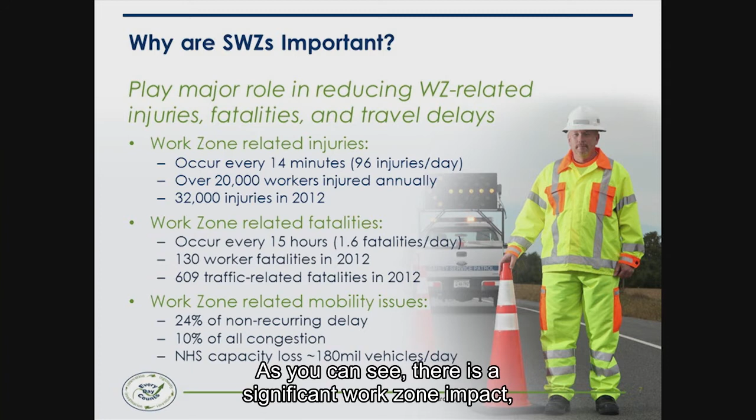In order to understand the need for smarter work zones, it is important to understand the scope of the work zone mobility and safety problem. Here are some statistics: in regards to safety, during 2012 we had 32,000 injuries and 609 traffic-related fatalities. In the case of mobility, work zones result in approximately 24% of non-recurring delay and 10% of all congestion. This results in a National Highway System capacity loss of approximately 180 million vehicles per day and an annual fuel loss of over $700 million. As you can see, there are significant work zone impacts, and therefore the need for smarter work zones becomes very important.

So we have identified two initiatives: the project coordination and the technology application. We will discuss this in more detail after the introduction segment.

We're currently working on an implementation plan, and right now we are asking you to provide feedback. We have been doing seven summits, and this will be our sixth summit. We have one more summit, and we need your help to understand what your needs are and what tools we can develop to help you implement the Smarter Work Zone initiatives in your state.

Our plan will establish goals for specified numbers of state DOTs to adopt activities under the identified initiatives that I mentioned earlier. The plan, again, is to have an implementation plan by January 2015.

Federal Highway staff from Headquarters Office, Resource Centers, and division staff will be providing technical assistance to the state DOTs to overcome barriers and any obstacles during the implementation of these initiatives. The support may include pamphlets, workshops, webinars, and peer-to-peer exchanges.

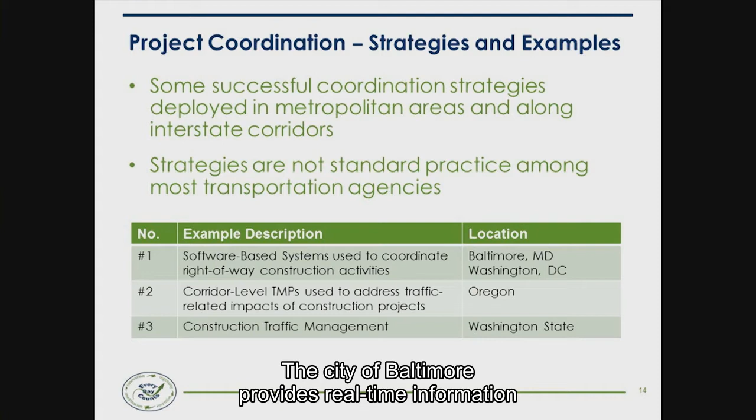The City of Baltimore provides real-time information on infrastructure projects across the city via a web-based system accessible to all stakeholder groups, and each project is mapped via GIS data points.

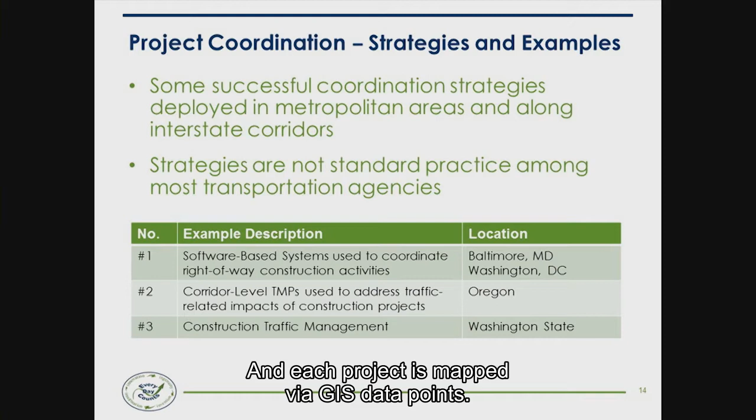Before this project, they had a meeting with all the city staff, gas companies and water companies, and found out that 90% of the roadway cuts were being conducted due to requests from the local gas and water companies. Since then, they have tried to coordinate these events, and during the first year of implementation, they reported cost savings of between $350,000 to $500,000. So you can see coordination not only can save you money, but also retain the quality of your pavement.

In Washington, D.C., DDOT has a project management system that tracks and analyzes the cumulative impacts of all work zone projects by the DOT, the developer, and utilities for a moving 5-year period. The system allows for early identification of project conflicts and impacts, and gives greater ability to reduce and manage traffic disruptions for road work.

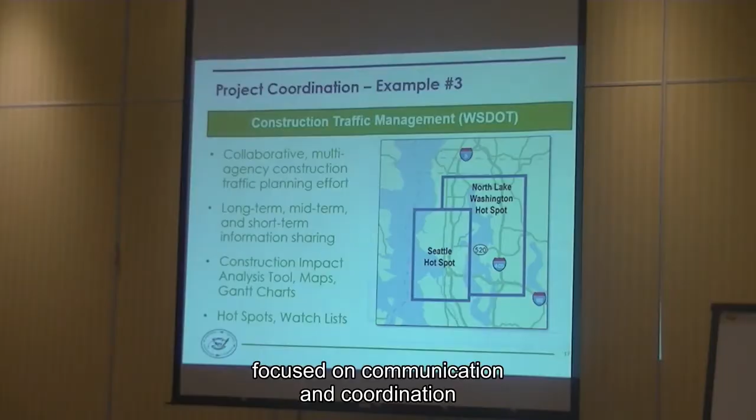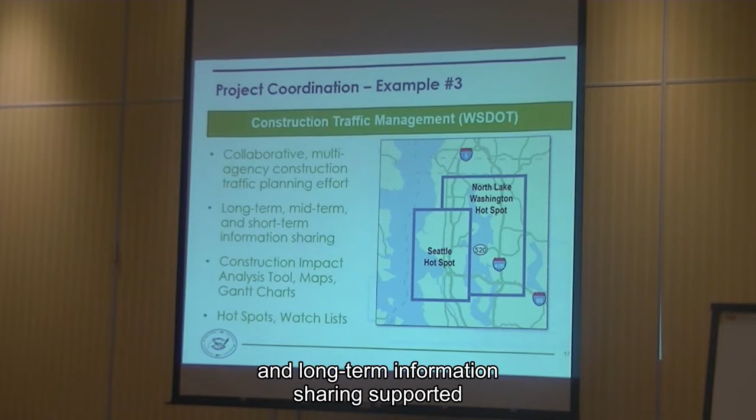Washington State has a collaborative multi-agency construction traffic planning effort focused on communication and coordination amongst projects and agencies in the state. These coordination efforts include short-term, mid-term, and long-term information sharing supported by tools developed by the Washington DOT.

There is a project coordination tool available called the Work Zone Implementation Strategies Estimator, also known as the WISE tool. It's a product of the SHRP2 R11 project, and it proactively reduces work zone impacts.

It includes two modules: the planning module with optimized sequencing of renewal projects that feeds into the operations module, using DYNASMART-P as a platform to evaluate impacts for individual strategies at the project level. The target audience is planners and program managers in moderate and large MPOs with an active renewal program.

This tool helps bridge the gap between planning, the MPO, and the design and construction offices. It has the ability to analyze demand and duration-based strategies. Information about that tool is now available in documentation and a user guide at TRB.

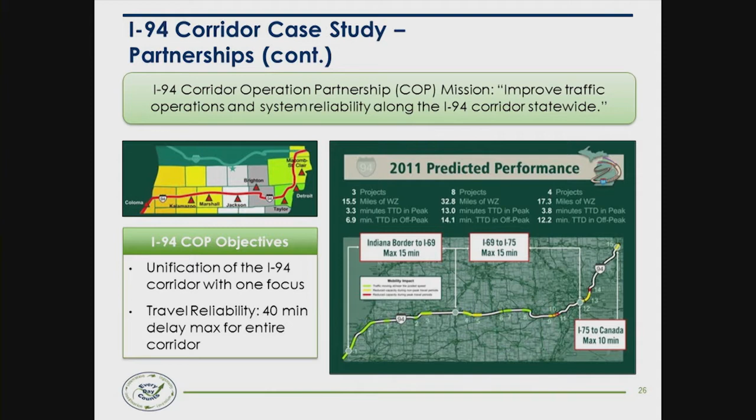Once they started looking at the travel delays, then they wanted to say, all right, how do we bring this down to user delay costs? And to start that, they wanted to look at recurring and non-recurring congestion. Obviously, recurring congestion is your normal commute periods when you have your traffic level out there. And then when they started to look at it, incidents were something that no matter what they did, whether it was a weather-related event, a work zone, incidents on the roadway were common across all barriers.

So they decided to segregate out those 3 categories: normal recurring congestion, work zone congestion, and winter-related. Being in Michigan, they have their fair share of snow. And what they found was more than half of the delays that they saw in that corridor were because of winter or work zones. Obviously, they knew that they had to make a change.

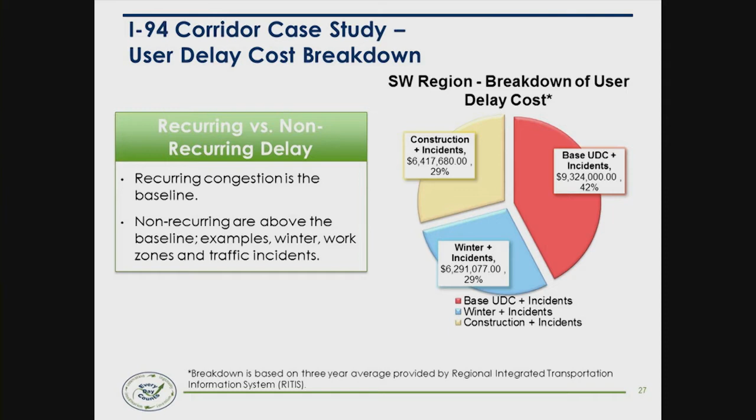Knowing now that they have the issue with delays and they were starting to predict what their delays are in work zones, they started to actually measure user cost performances. So they set a goal in 2013 of a maximum user delay of $108 million across the board for all the different projects they would have going on.

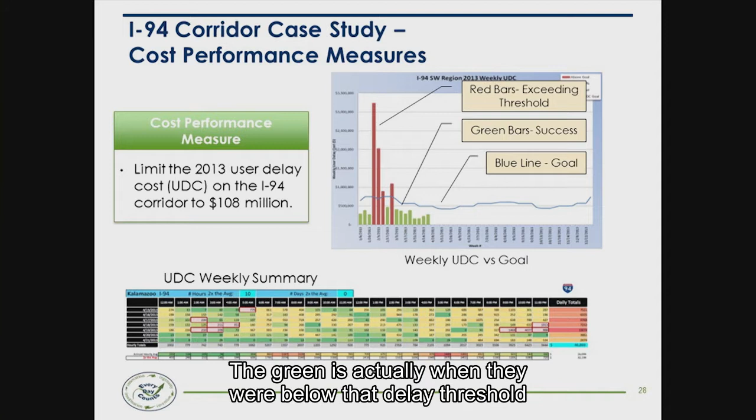Collecting that data for the 275-mile corridor, they developed scorecards. This is a year-to-date scorecard, and this is their goal threshold line. The green is when they were below that delay threshold as they're tracking across the year, and the red is when they've exceeded it.

Then when they start looking on a weekly basis at the different projects they had going on, this scorecard was on their website, so the public could actually see what was going on. That forced a change in focus on the operations and construction side, that they didn't want to be held responsible for not delivering that goal.

This graphic is actually very complicated, but that scorecard was also on there. It was a daily and weekly summary of all the different projects they had going on. It's hard to read, but it was very transparent, and it actually caused them to change the way they were doing things.

Again, that's just summarizing the three colors. This goes back to 2011 data when they were using their predictive models, and this is what they charted out - basically the minutes of delay for each of the different projects within the three regions.

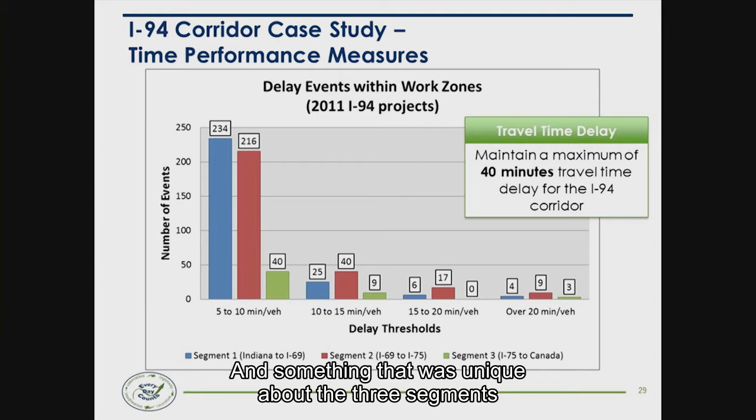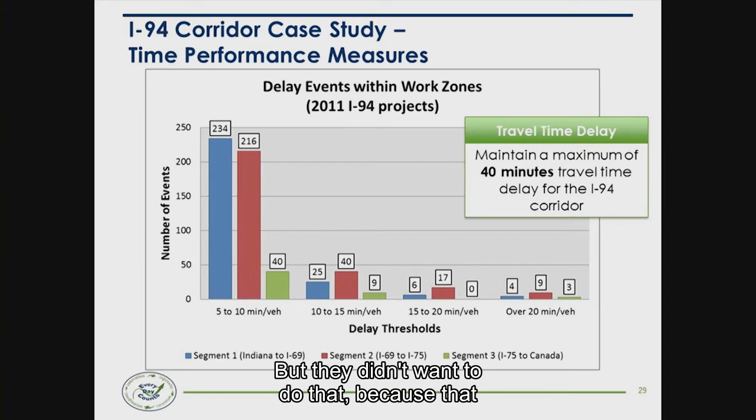Something unique about the three segments they created along this 275-mile corridor: the logical choice would be to make breaks at the regional boundaries, but they didn't want to do that because it didn't work with collaboration. They actually decided at key junction points along the corridor is where they would set the boundaries for measurement. That forced Region 1 to work with Region 2, and 2 to work with 3, as well as the different counties that made up those areas, so they were cumulatively working together to address those delays.

It sounds all well and good to start looking at this information, but they needed data, and they needed to start looking at the tools and technology they had out on the roadway. So starting in 2011, they started to implement a sizable amount of ITS equipment along the corridor so they could capture data on a real-time basis. Instead of just using predictive models, they were bringing in vehicle probe data and sensor data so they knew real-time what was going on, and then they started using that tool to backfeed some of their scorecard charts.

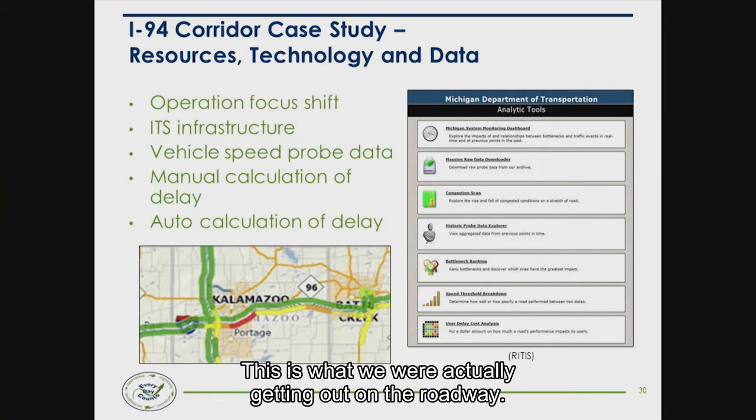So they said, we predicted a delay of X number of minutes - this is what we were actually getting out on the roadway. And they're continually reviewing that information and trying to improve their performance.

One of the other unique things they did was the communication. We all know that if you're going to collaborate, that communication process has to be part of the mix. So they set up maintenance of traffic huddles, weekly meetings where they brought in maintenance, operation, construction, and the permit section who was giving out private development or utility company permits. They all got together and discussed what projects are coming forward, how can we work together to minimize those delays across the region.

It actually forced a change in behavior where they would share time. If they had a project where they knew they were going to put in beams and have to do a rolling roadblock, or do a bridge demo that was going to cause more delay, they would actually borrow time from another project. So it really changed the focus of how they did things, and again, it was all driven by the decision from upper management, from the director who said you need to change.

Continuing with the communication, like I said, it came from the top. It gave them that support to make that time commitment. Obviously to meet and have those weekly meetings takes time out of normal activities. So that was one of the key components that forged this change.

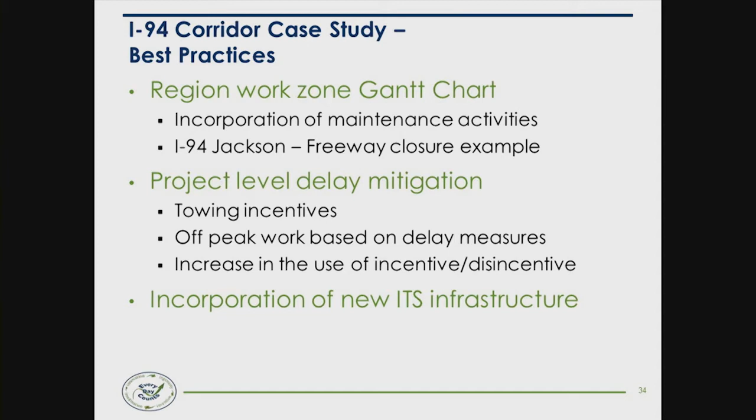So that was the case study from Michigan DOT. Chris Brooks from Michigan DOT provided this information. If there's any questions specifically to that—I know quite a bit about this from presenting it a few times now—but if there's more questions, you can ask Chris.

So what are the overall benefits of project coordination? We heard some examples from the municipalities—Baltimore, Washington D.C., Washington State, Oregon—and then we just saw the case study from Michigan. I think at the end it's that greater ability to reduce work zone impacts and disruptions onto the public. By early identification during the project development, if you can schedule and plan things out so you have this coordination, overall it's cost savings, fewer impacts to the public, and you can dynamically adjust that schedule based on knowing what's happening real time on the roadway.

Again, the improved communications among the transportation agencies—I can't understate how important that is, because everyone has their own mission, as I mentioned in the beginning. They all want to get their job done because they have a bottom line. They don't want to add cost to the project. But sometimes that coordination between the groups, you actually can show a cost savings, like in the case of Baltimore, where they were saving money after the first year. The public sees it as less disruption on them, less street cuts, better pavement quality, and I think it goes a long way to keeping satisfaction with the public.

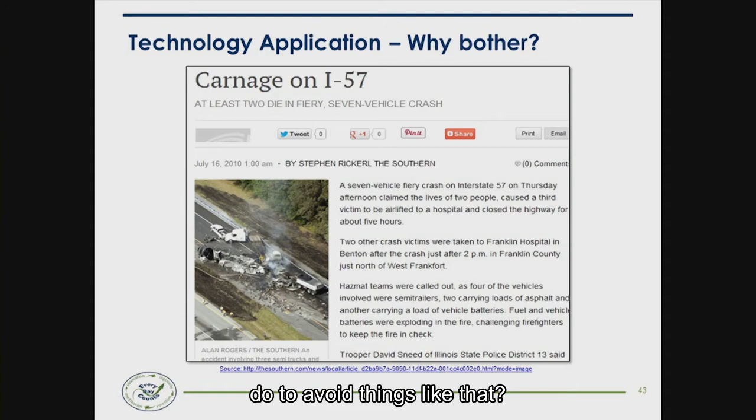I'm sure all of us have seen articles similar to this. And then you say, well, our work zone meets all our standard regulations, our standard drawings. The truck driver was hopefully not speeding. What else can we do to avoid things like that? Well, technology application may be the answer you're looking for.

When we're looking for technology applications, we want to make sure they are traffic responsive. They incorporate real-time data that provides enhanced information delivery to drivers, increasing awareness of changes to traffic conditions such as weather and congestion ahead, and enhancing compliance with static traffic controls. You don't want a portable message sign to replace or basically repeat the same message as a static sign. You want enough information where the driver can react, whether it's reduce speed ahead or be prepared to stop in advance of the work zone.

We want the functions to be automated and dynamic. We want the information delivery to not require special action on the part of the drivers. You don't want them calling 511 or looking at an app—it's looking at that PCMS and warning them in advance that there may be congestion ahead.

Other considerations: we want to make sure it's locally focused, targeting information to drivers approaching work zones. The technology application should provide a complete solution, not just sensors or cameras. We want them to all coordinate that information together, so when the sensor perceives congestion ahead or the cameras have seen it, it can go back to a traffic control device such as PCMS or dynamic board and show and warn drivers in advance that they may have a reduction in speed or may have to stop because of the condition ahead.

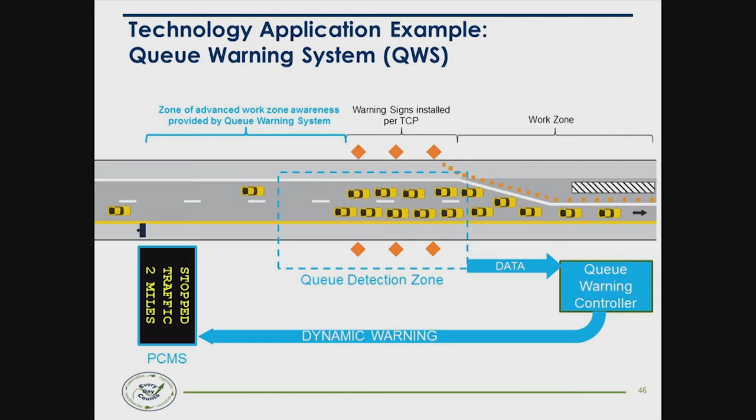Now, we understand that not all states have a law in place to implement this. But during this initiative, if your state wants to find out what other states are doing, and perhaps we were in the same situation a year or two ago, we can help you find that state and share their knowledge.

Now, if you do have a state law that allows you to have VSL signs, make sure that in order for them to be enforceable, they have to be black and white, because black and white means regulatory. If you have a sign with an orange background or a yellow background, that means warning.

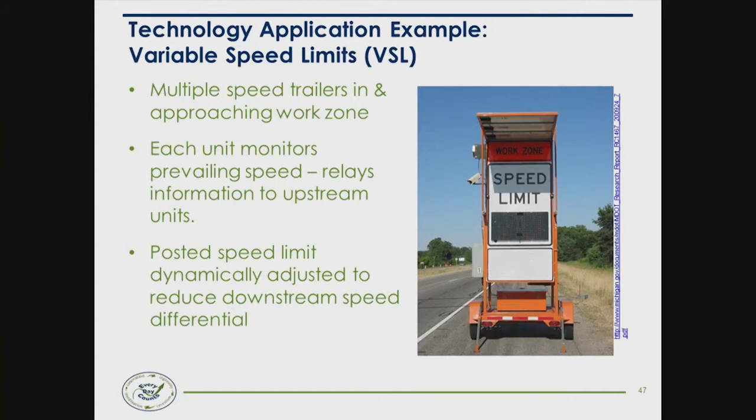Another example is the dynamic lane merge. In low volume traffic, the greatest safety concern is high-speed aggressive merging occurring at the merge point; in this case, the system instructs drivers to merge early to avoid unsafe last-minute maneuvers. In higher volume traffic, we want to maximize lane utilization and minimize queues, in which case the system instructs drivers to use both lanes up to the merge point and do an alternating zipper merge. In both cases, the direction to drivers is clear and there is no ambiguity over expected behavior.

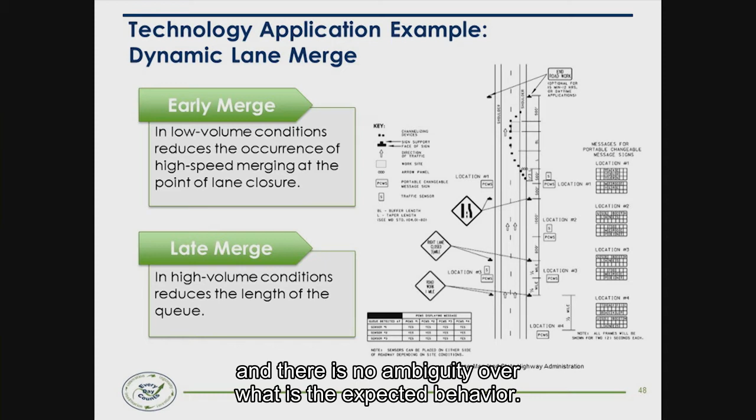So what are the system components? We need infrastructure: sensors, traffic control devices capable of receiving commands and changing their displays automatically, and communication infrastructure for making everything talk to each other.

But not only that, we need a business process. It's like we mentioned earlier with project coordination. You do have to have some standard drawings, specifications, and procurement elements that can help you move into the next project. We know all projects react differently, but you have to start thinking about how to implement these ITS applications, working them into your contracts, and having a specification that can help you during the project.

What we have found is that a few states have implemented different technology applications, but we're not standardized at a national level. Everybody's doing their own thing. We want, with this initiative, to promote smart work zone technology applications nationwide and create standardization.

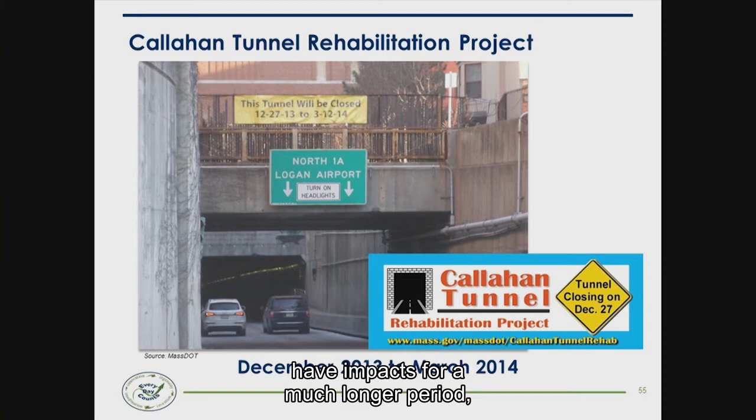This was a perfect example where we used project coordination and technology application to mitigate the impacts from this project. The Callahan Tunnel carries 30,000 vehicles a day departing downtown Boston, and we decided to shut that tunnel down completely to get in and get out in a 72-day period, rather than doing stage construction, which would have caused impacts for a much longer period and probably still the same level of congestion.

This tunnel is a 2-lane facility, and while it only carries 1,200 vehicles in the morning peak, it was that afternoon condition with 2,300 vehicles an hour in those 2 lanes that we had to disperse among other routes already over-congested in that PM peak period.

So why are we considering a smart work zone? In Massachusetts, we use them as a tool in our toolbox to mitigate impacts. The Work Zone Safety and Mobility Rule asks states to start looking at data and operations in that work zone. Now we're using the smart work zone for mobility applications - we want to use real-time information to deliver back to the public, to help them make route decisions and try to prevent congestion in areas where we don't want it.

Safety, as mentioned before, having real-time information on where that queue is developing and getting feedback, whether it's a queue message like queue ahead 2 miles, gives that information back to the public so they're prepared for what's coming and it helps prevent secondary incidents. Also using this technology, you can detect incidents on the roadway.

And finally, it's the planning and monitoring. Having real-time data of what's going on in your work zones and construction, you can continually refine things as you move forward, and use that data for future projects and planning the next time you're on that roadway or a similar project. So we felt the project on the Callahan Tunnel was a perfect opportunity to use this technology.

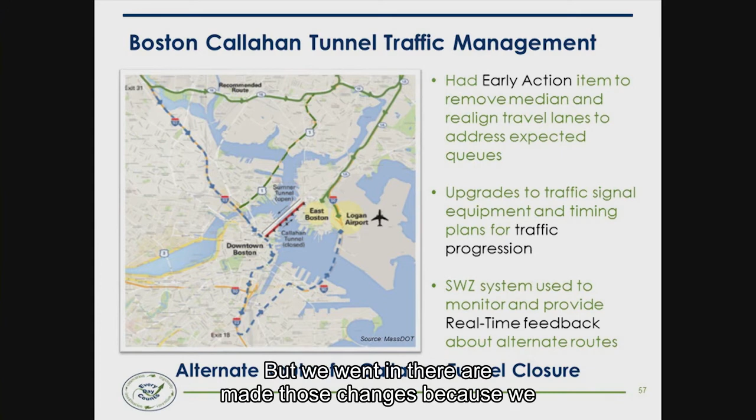We also went out to 25 intersections, evaluated the existing conditions and equipment, made equipment changes, and did retiming plans to progress traffic along this corridor, which was pretty much all signals. They weren't even the DOT's yet, they will be soon, but we went in and made those changes because we knew we had to progress traffic along that corridor.

And finally, we also knew that we wanted to use the smart work zone system to give that real-time information and help the end user make an informed decision while they're out there.

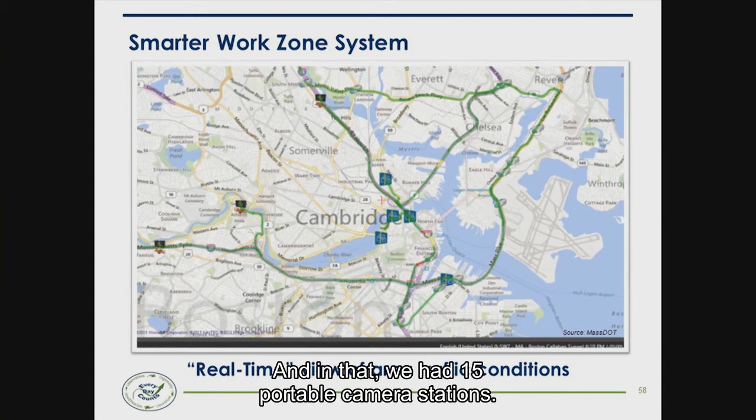This is just a screenshot from the Callahan Tunnel project showing how far we were using the smarter work zone technology. This is our coverage area, and we had 15 portable camera stations, 6 that were camera and message board combinations, and 5 message boards, in addition to all the other ITS infrastructure in the metropolitan Boston area. We were using a combination of all of it to deliver this real-time information.

And in this project, it was fed by probe data. Traditionally we like to have sensors out there monitoring traffic conditions, getting counts, volume, and speeds, but this network was too big to just use trailers, so we went with probe vehicle data.

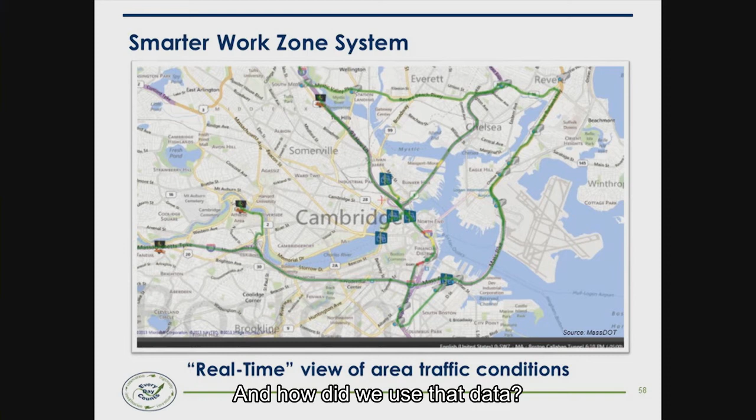How did we use that data? This is an example of 2 of the delay thresholds we developed for all the different message boards, because we wanted to pull that data real time, analyze what the conditions were, and then deliver a corresponding message back to that message board to help the public understand what the conditions were.

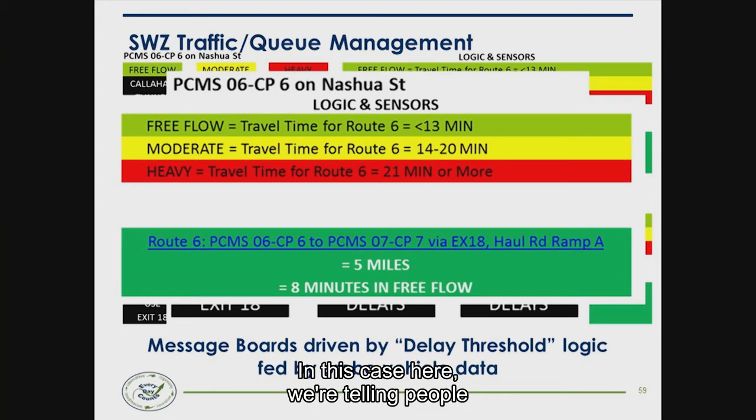So these are two examples. In this case, we're telling people to use exit 18 during free flow conditions, but once things started getting worse, we pushed people towards using the Tobin Bridge as an alternate route.

This is just a close-up of that. So we had that three-tier system, basically using travel time — I'll use free flow loosely, knowing we had some recurring congestion in the corridor, so our free flow conditions had a lot of float in there. But as we dropped down to the different delay thresholds, we would deliver a different message, and I'll show an example of that soon.

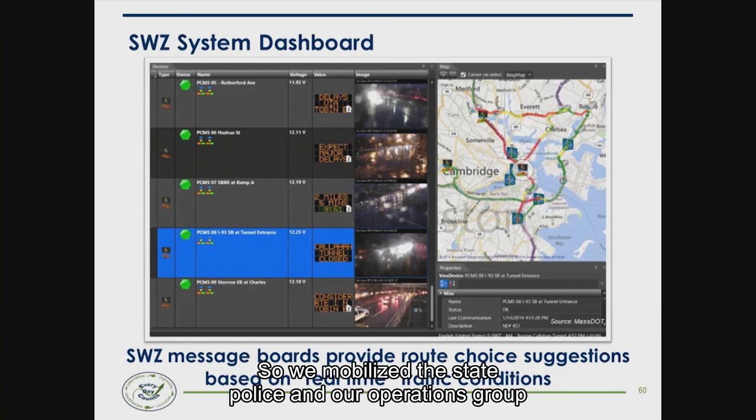This is the system dashboard our operators used. Because of the magnitude of this project, our Metropolitan District office set up like an operation command center. We have our traditional highway operations center where they manage traffic cameras and message boards across the rest of the state, but while they were helping with this project, they knew they couldn't deliver the hands-on attention necessary, so we mobilized the state police and our operations group from that district.

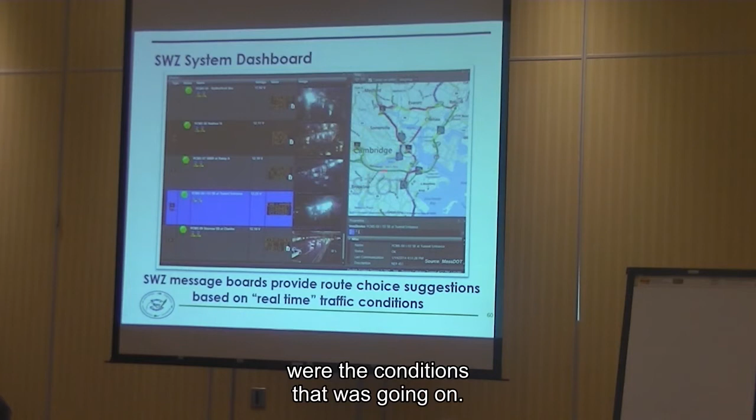Every afternoon, since the morning wasn't really an issue, they got together and continually monitored conditions. In this operation, you can see the red indicating conditions, and you could look at the camera to see what was going on. If there was red in an area where there shouldn't be an issue, you could check the camera, and also look at what the message board was saying to make sure the public was getting the right message.

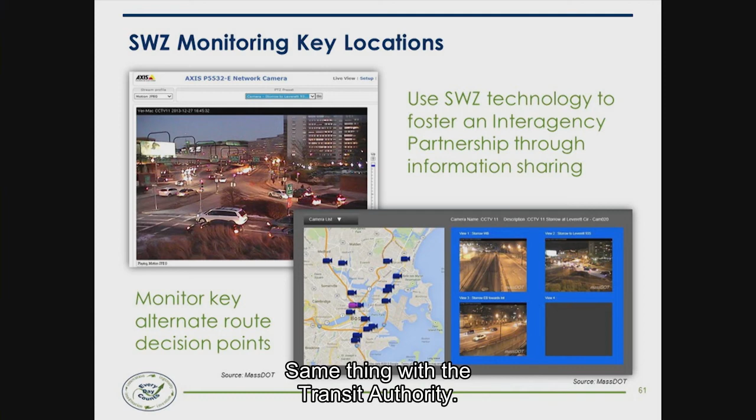Same thing with the Transit Authority. They wanted to see what was going on in those cameras because they had to manage headways for our Silver Line transit line. The City of Boston was particularly interested because taking that link, which left right in downtown Boston, was now going to cause congestion in the city streets, so we were monitoring those conditions.

So what are some of the positive results we saw through using the Smart Work Zone? Essentially, using this equipment and delivering information back in real time has helped give the public information to make an informed decision, or at least understand what the delays were and what to expect. From this, we actually got a lot less negative feedback. In some cases we got positive feedback based on the fact that people thought it was going to be Armageddon with the closure, but things actually ended up working out pretty well.

Having that information about stopped traffic in the queue warning system again helps prevent those secondary crashes, or actually any crashes from occurring, by being able to monitor those conditions in real time.

And then finally, sharing that system access and data in real time with your partner agencies - in our case, we had all the groups within Boston - helps them in a collaborative effort. They felt they were part of this project and that they had knowledge of what was going on, and it wasn't just DOT doing our own thing. It was a shared effort.